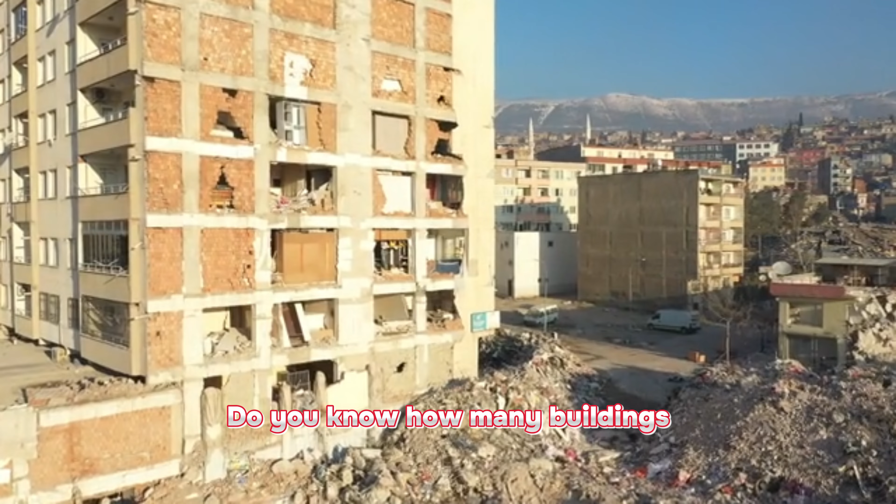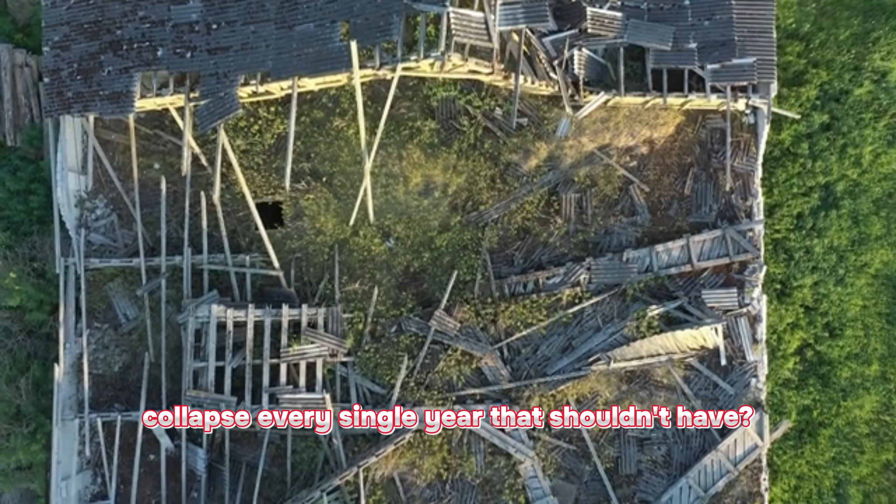Do you know how many buildings collapse every single year? Actually, hold up, let me rephrase the question. Do you know how many buildings collapse every single year that shouldn't have? While rare, structural collapses due to design flaws or poor construction can have devastating consequences. This highlights the importance of strict engineering standards and regular safety inspections to prevent such failures.

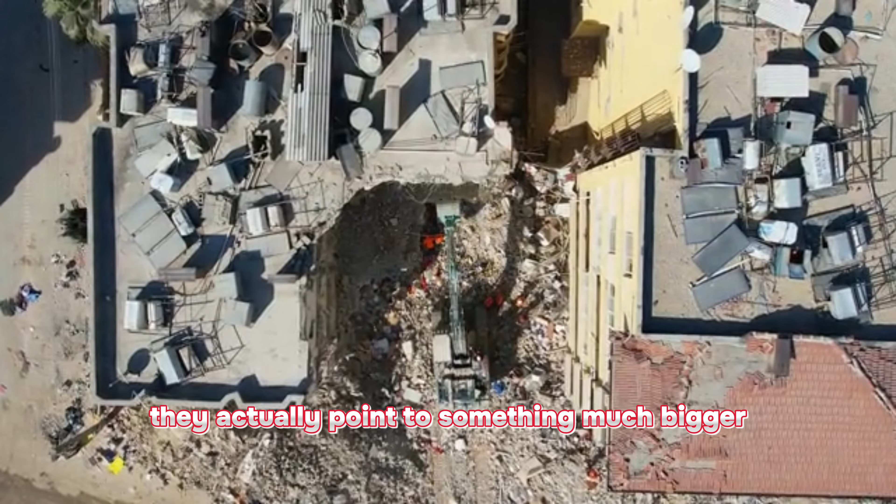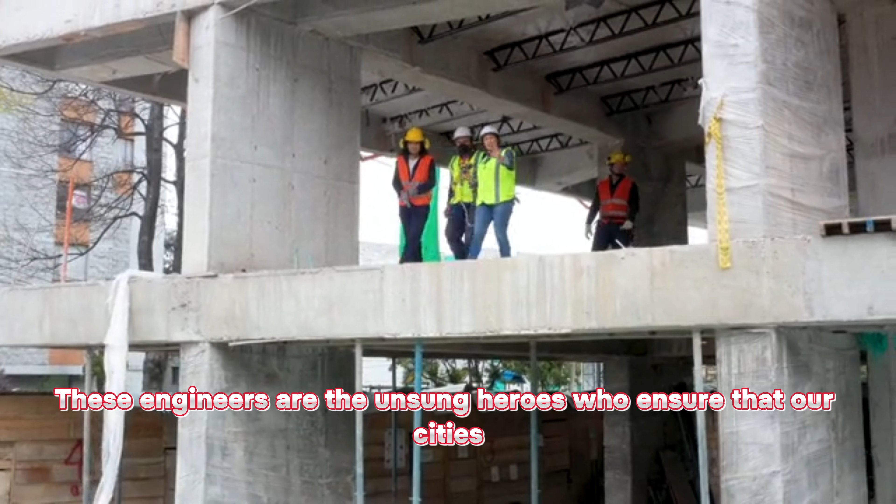And while these instances might seem like isolated incidents or just bad luck, they actually point to something much bigger. They point to the critical need for structural engineering. Now, structural engineering isn't exactly the sexiest topic, but it is vital to our survival. These engineers are the unsung heroes who ensure that our cities are not only beautiful and functional, but also safe. They're the ones who figure out how buildings stand, bridges stay upright, and skyscrapers don't topple over in storms.

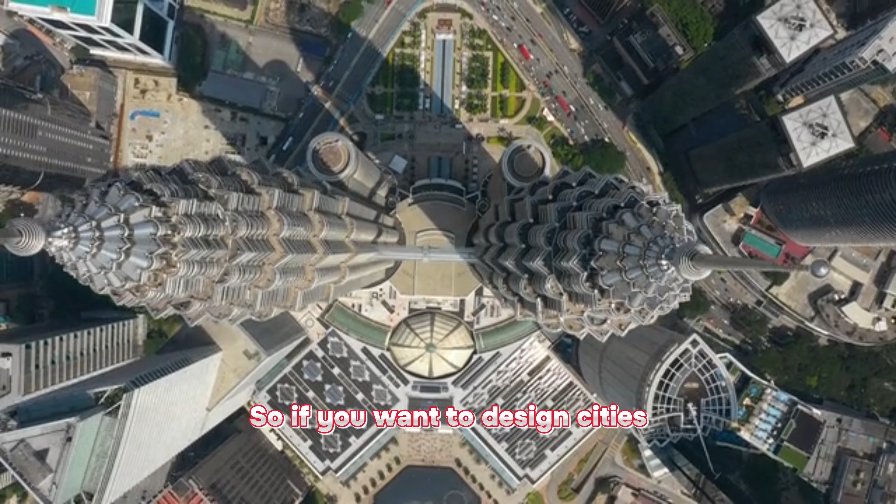So if you want to design cities, you need to start with the basics. You need to understand the fundamental principles of structural engineering that make all of this possible. If you thought being a city designer was all about aesthetics and urban planning, think again. You can have the most beautiful skyline in the world, but if it's not structurally sound, it's all gonna come crashing down. And no one wants to live in a city that's constantly crumbling around them.

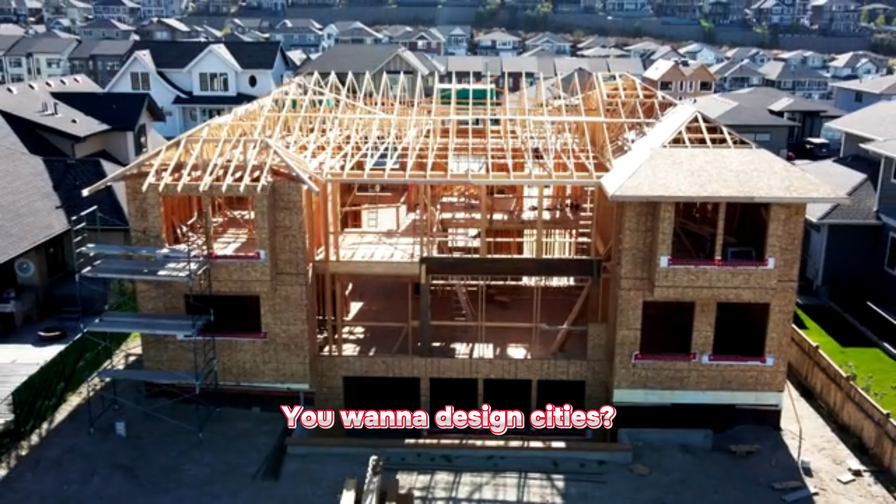You want to design cities, you gotta start at the bottom and work your way up. You gotta understand the nitty-gritty of how buildings stand and how they withstand the test of time. It's not enough to just have a pretty picture in your head. You need to know the science behind it all. Let's start with a simple question. How do buildings stand up? I mean, they're just made of blocks and mortar, right?

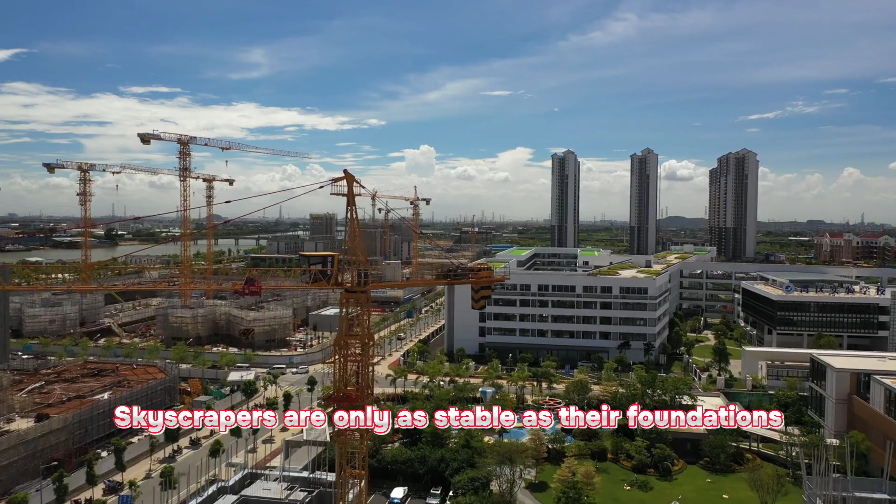Well, not exactly. The modern skyscraper is a marvel of engineering and technology, a testament to human ingenuity and the power of physics. These towering giants of steel and glass seem to defy gravity itself, reaching for the sky with an effortless grace. But don't be fooled by their seemingly effortless presence. Skyscrapers are only as stable as their foundations, which are often more complex than you might imagine.

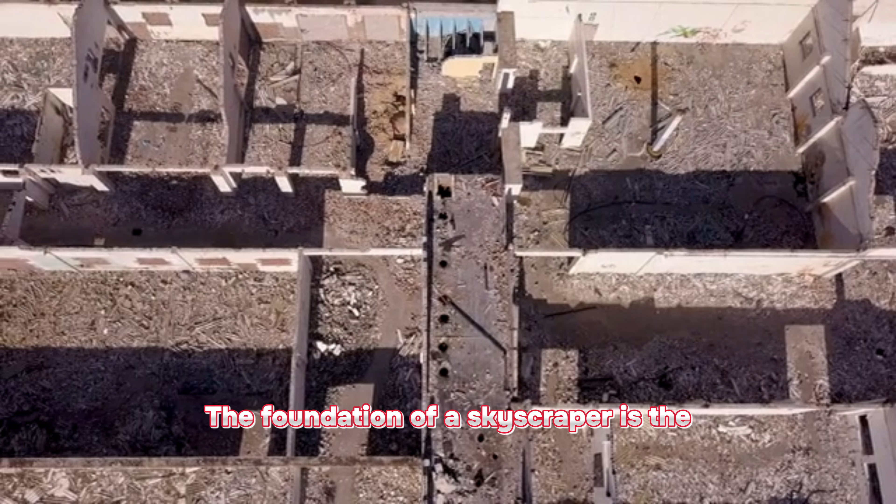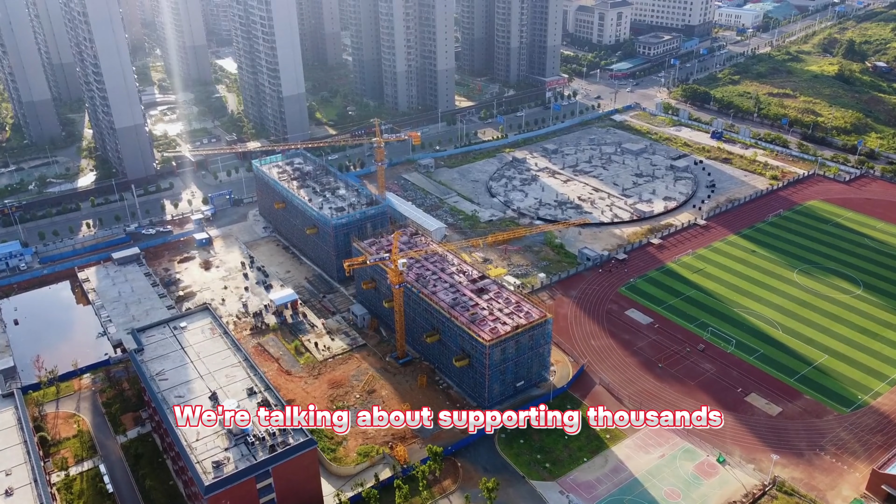Now let's talk about the secret to a skyscraper's stability, its foundation. The foundation of a skyscraper is the structure that supports the entire building. It transfers the weight of the building to the ground below. And trust me when I say that a skyscraper's foundation is no joke. We're talking about supporting thousands, even millions of pounds of weight. This is where structural engineers really earn their keep. They've got to ensure that the foundation is strong enough to withstand the weight of the building as well as any external forces like wind or earthquakes.

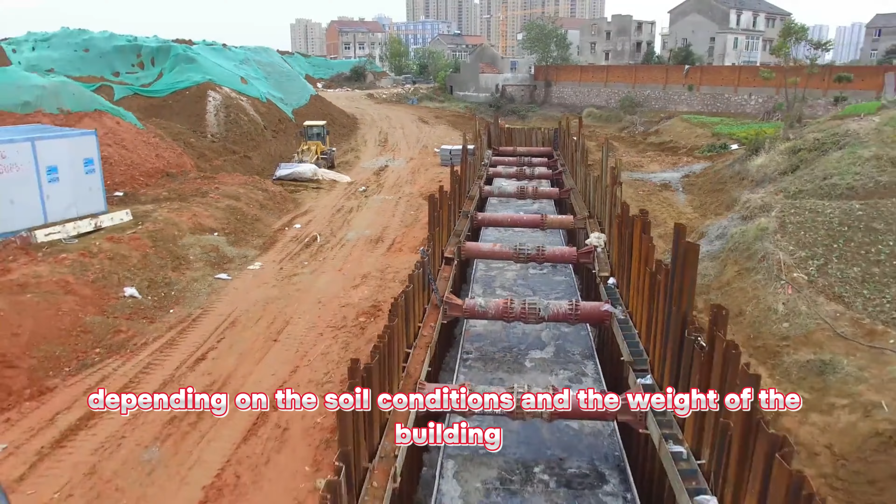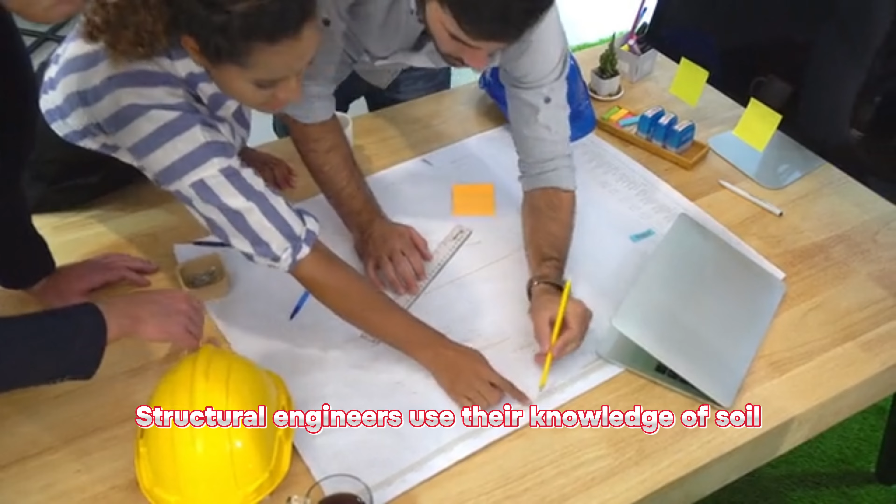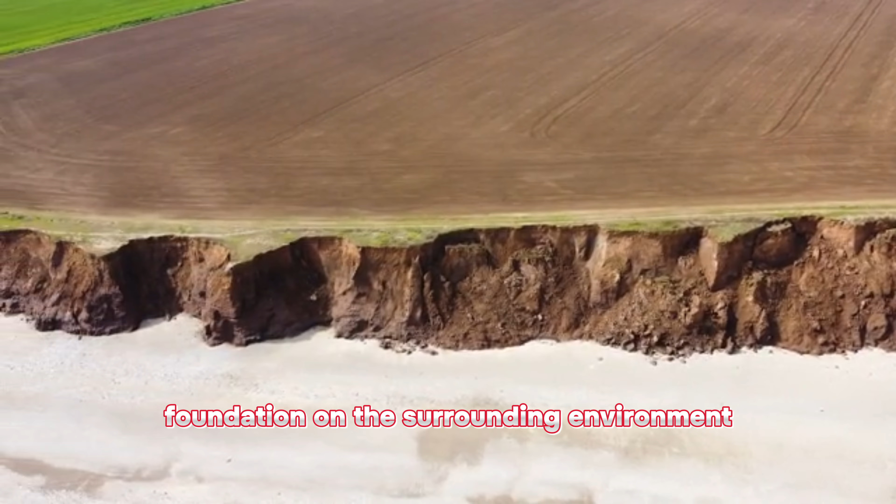Now there are different types of foundations depending on the soil conditions and the weight of the building. Some common types include shallow foundations, like a raft foundation that distributes the load over a wide area, and deep foundations, like pile foundations that transfer the load deep into the ground. Structural engineers use their knowledge of soil mechanics and structural analysis to determine the best type of foundation for a particular building. They also have to consider factors like soil erosion, settlement, and the impact of the foundation on the surrounding environment. But wait, there's more.

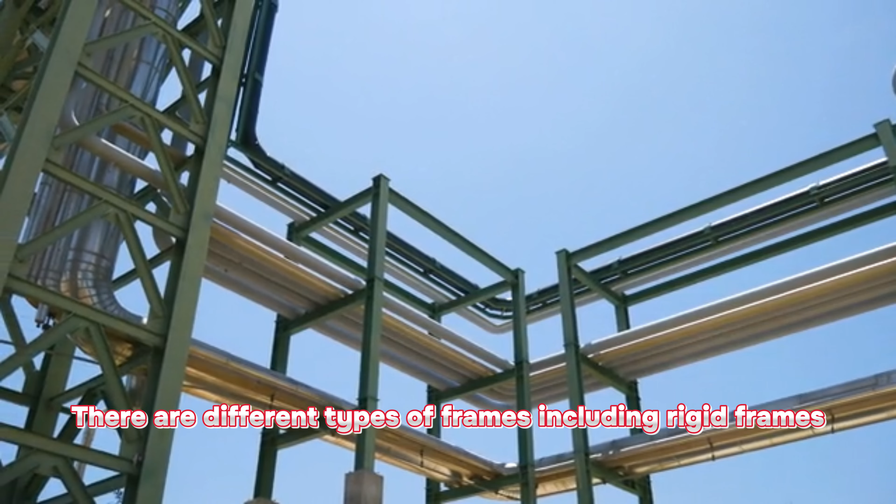The foundation is just the beginning. Structural engineers also play a crucial role in designing the building's frame. The frame is the skeleton of the building that provides the overall stability and strength. It transfers the loads from the foundation to the rest of the building and distributes them evenly. There are different types of frames including rigid frames, braced frames, and trusses. Each type has its own advantages and disadvantages, and structural engineers must carefully consider the loads and the building's design to determine the best option.

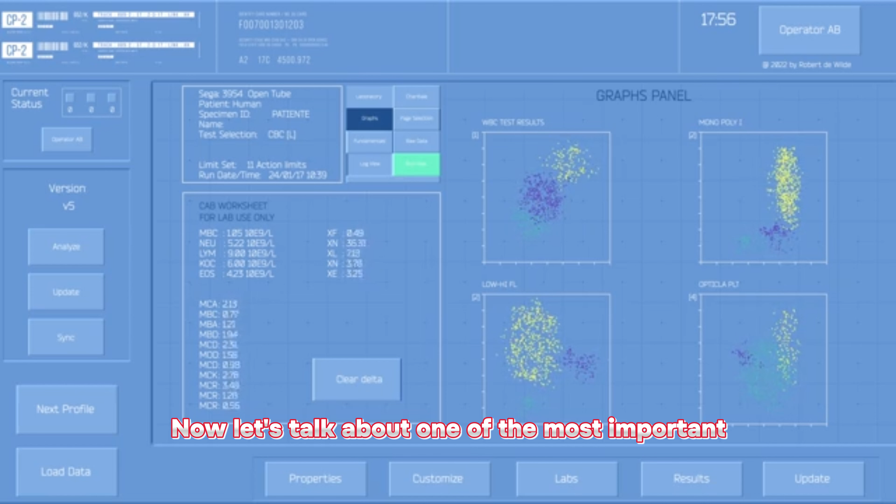Now let's talk about one of the most important aspects of structural engineering: load calculations. Structural engineers are responsible for calculating the loads that a building will experience during its lifetime. These loads can include dead loads, which are the weight of the building itself, and live loads, which are the weight of people or objects that will be inside the building. They also have to consider environmental loads such as wind, earthquakes, and snow.

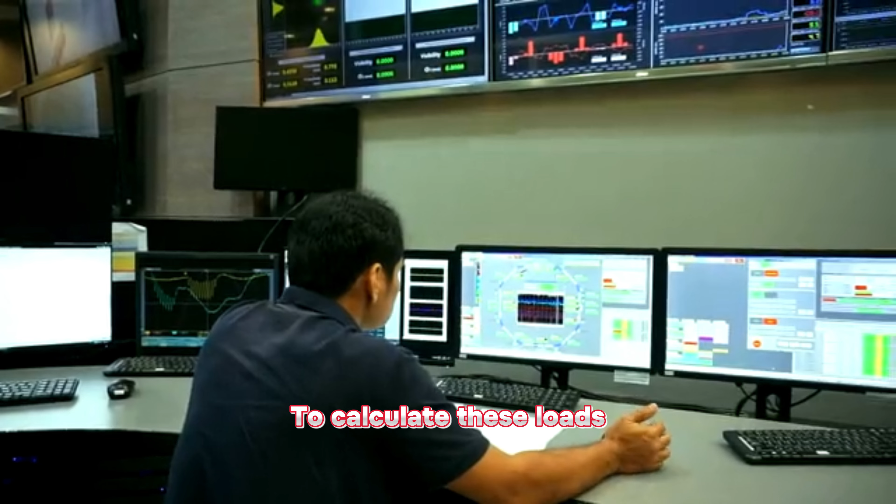To calculate these loads, structural engineers use specialized software and their own engineering expertise. Once they have the load calculations, they can design the building's structural system to withstand those loads safely. And let's not forget about materials. The materials used to construct a building can have a significant impact on its structural integrity.

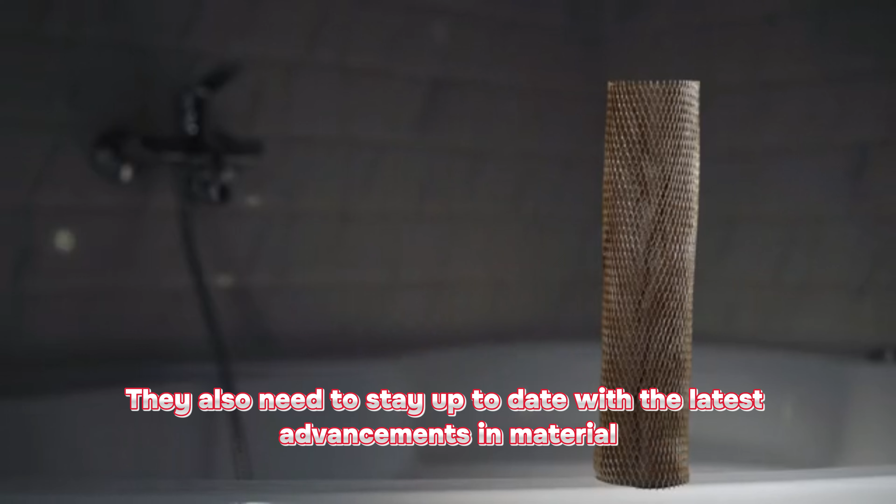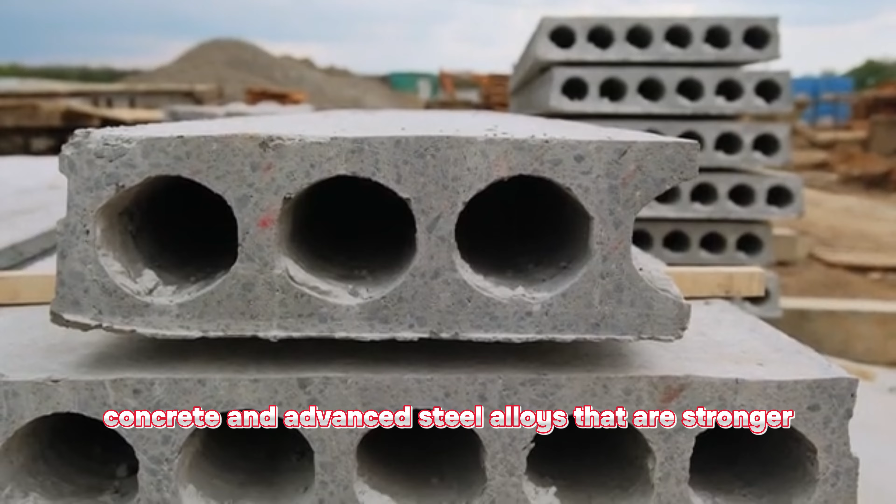Structural engineers must have a thorough understanding of the properties of different materials such as steel, concrete, and wood. They also need to stay up to date with the latest advancements in material technology as new materials are developed, for example, high-performance concrete and advanced steel alloys that are stronger and more resistant to corrosion.

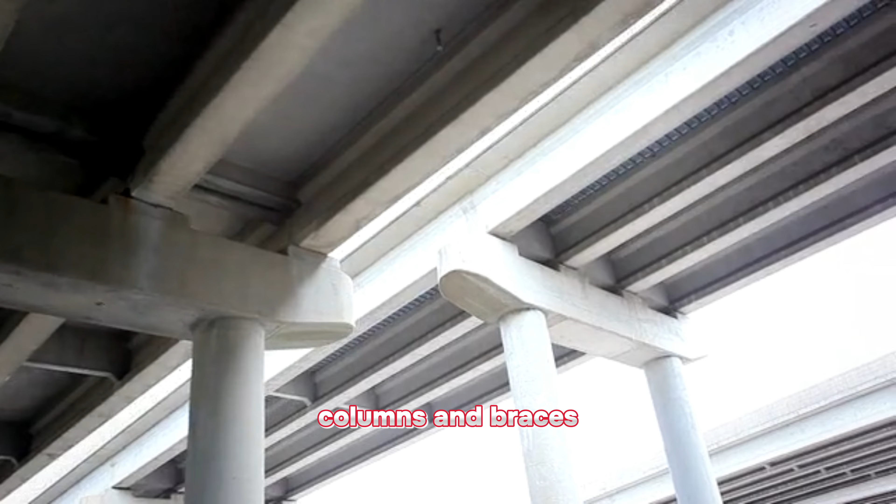One of the most important aspects of structural engineering is the design of joints. Joints are the connections between structural members such as beams, columns, and braces. The strength and stability of a structure depends on the integrity of its joints.

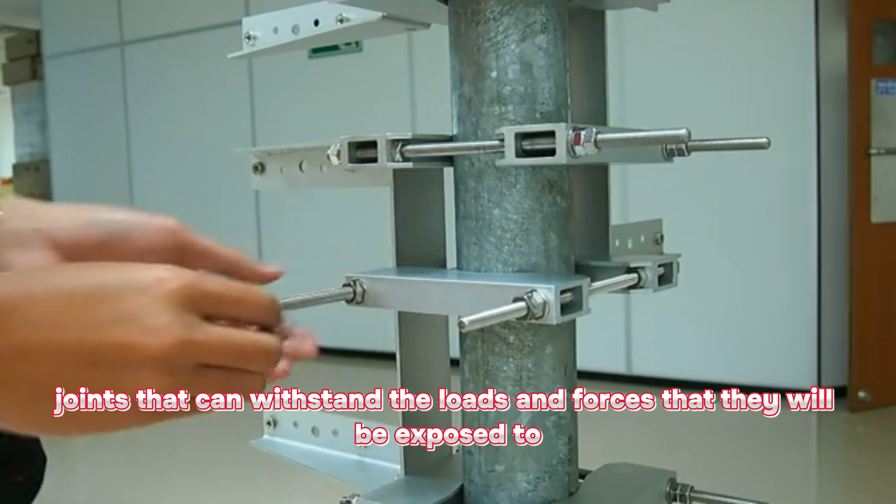Structural engineers use their knowledge of mechanics and material science to design joints that can withstand the loads and forces that they will be exposed to. This involves selecting the right type of joint, as well as the right fasteners and other hardware to ensure that the joint is strong and durable.

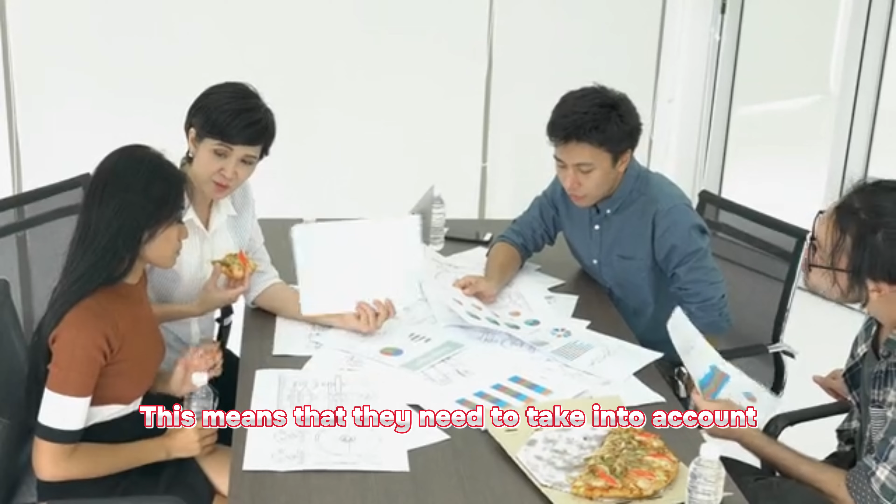Structural engineers also need to consider the constructability of the structure they are designing. This means that they need to take into account the methods and techniques that will be used to construct the building and ensure that the design is feasible and cost-effective. They work closely with contractors and construction managers to ensure that the building can be constructed safely and efficiently.

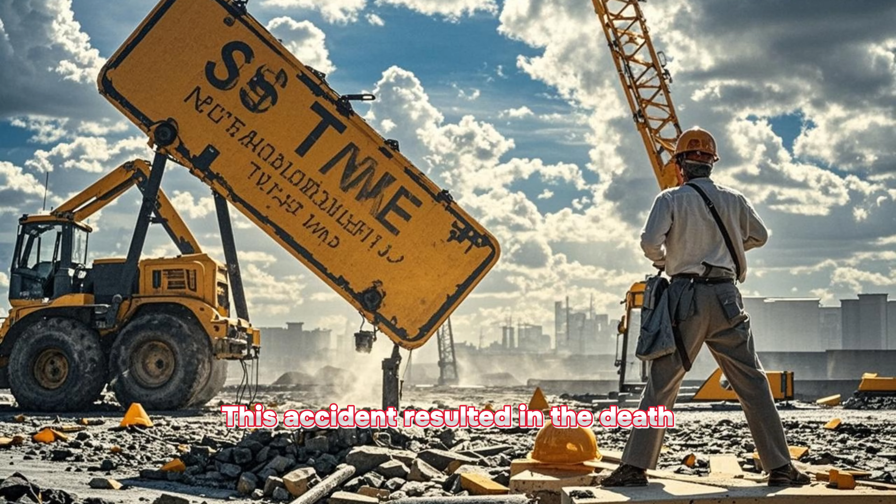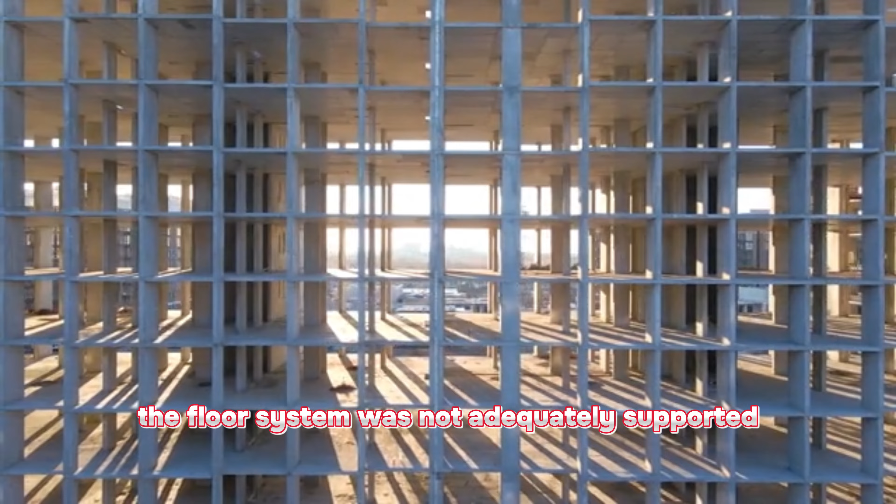Now, the primary cause of this collapse was determined to be the failure of the floor system. During construction, the floor system was not adequately supported, leading to a progressive collapse of the structure. Additionally, there were communication issues between the design team and the construction team, which contributed to the accident. This tragedy could have been avoided if proper engineering and construction practices had been followed.

Now, imagine you're designing a new high-rise apartment building in a major city. There are several key structural considerations that you'll need to take into account. One of the most important things to consider is the seismic activity in the area. Cities located in seismically active zones need to have structures that can withstand earthquakes.

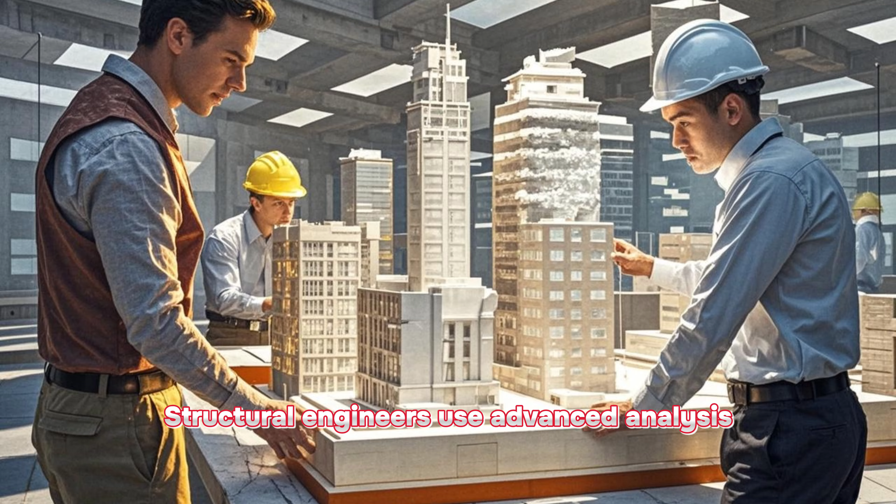This means incorporating special features into the building's structural system to help it resist the shaking and swaying that occurs during an earthquake. Structural engineers use advanced analysis techniques and design strategies to ensure that the building is stable and safe in the event of an earthquake.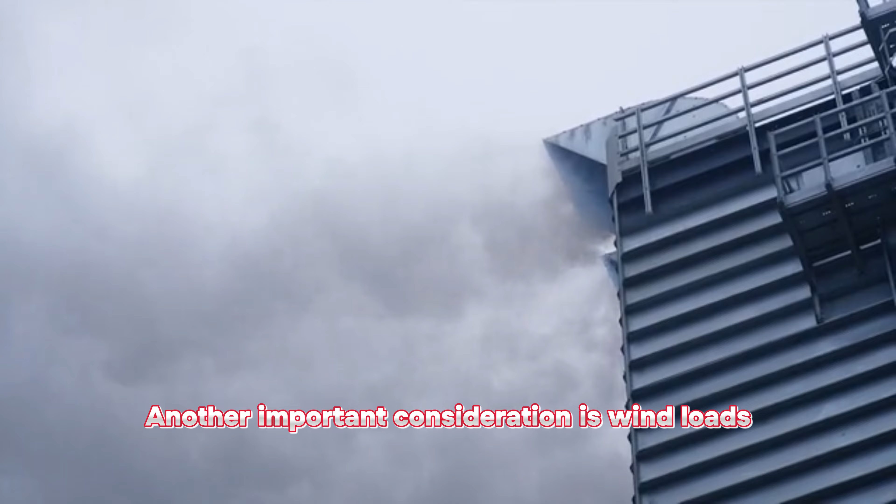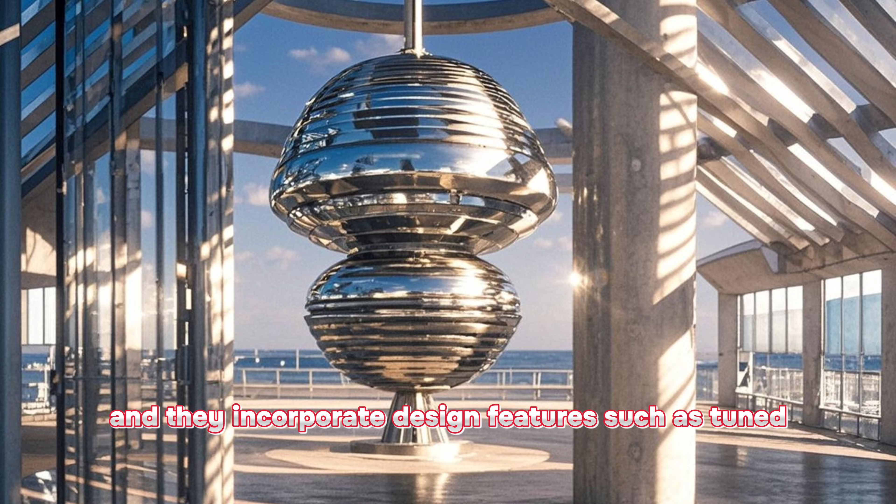Another important consideration is wind loads. High-rise buildings are particularly susceptible to wind load damage, so it's important to design a structure that can withstand high wind loads and prevent it from swaying or vibrating excessively. Structural engineers use sophisticated computer models to simulate the effects of wind on the building, and they incorporate design features such as tuned mass dampers or wind braces to counteract the effects of wind.

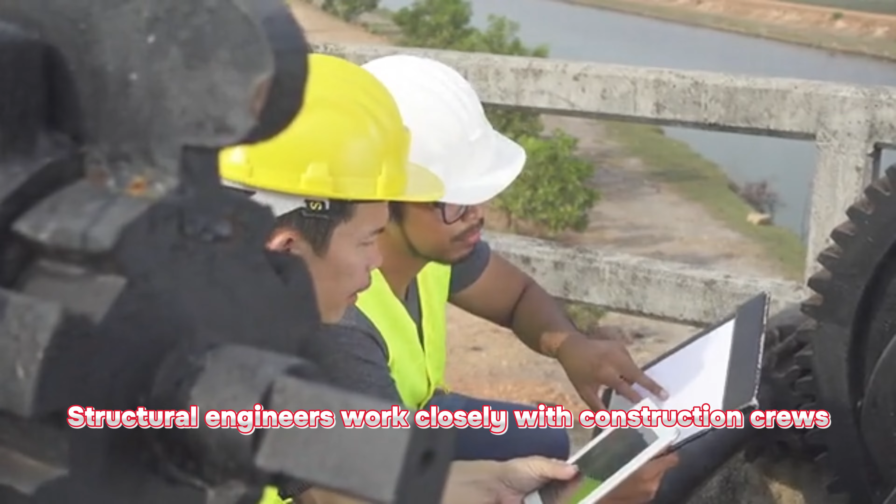Now, let's talk about construction. How the building is constructed can have a major impact on its structural integrity. Structural engineers work closely with construction crews to ensure that the building is constructed according to the plans and specifications. They also conduct inspections and tests to verify that the materials and construction methods meet industry standards and building codes.

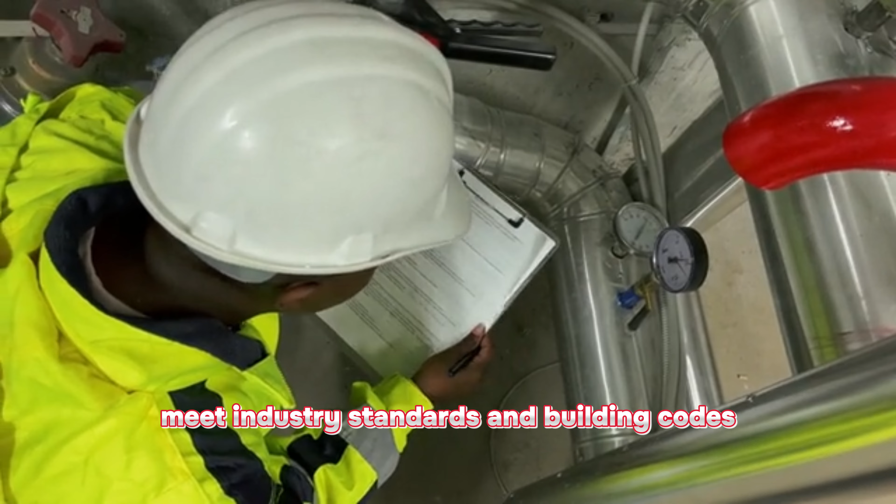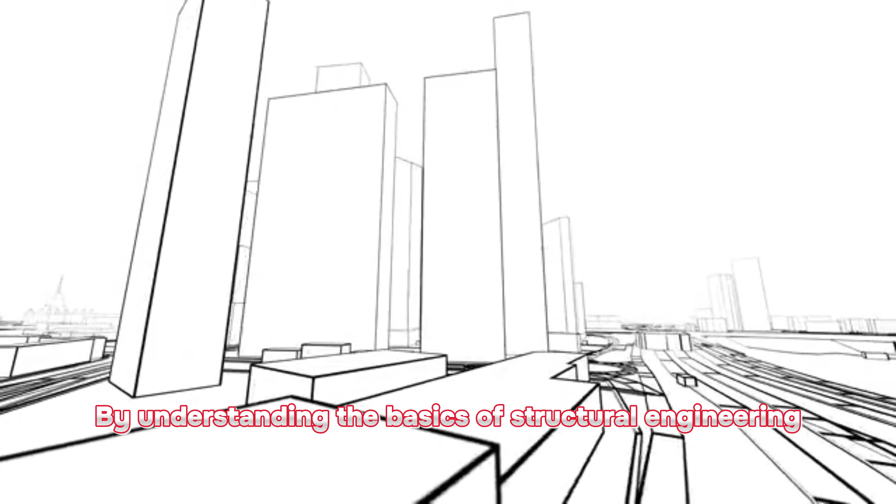Cities are more than just concrete jungles. They're living, breathing ecosystems that need to be planned and designed with care. Structural engineering is one of the most important aspects of city planning because without a solid foundation and framework, everything else falls apart. By understanding the basics of structural engineering, you'll be able to appreciate the complexity and importance of this field and how it impacts our everyday lives.

So whether you want to be a structural engineer yourself or you just want to be better informed about the cities you live in, hopefully this video was a good first step. Remember, the next time you're admiring a skyscraper or a bridge, remember the structural engineers who made it possible. They may not be in the spotlight, but they're the ones who really make our world stand up.